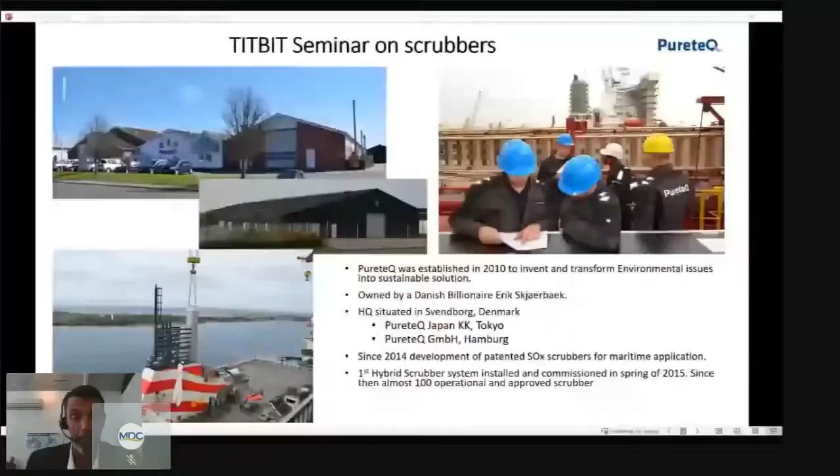First, I would like to say a few words about PureteQ, but if I could get up the presentation, please. Is the presentation on now, Henriette? No, it's now. The presentation is on now, Anders. Okay, thanks. Appreciate it.

Well, before I begin the presentation, maybe I should set the scene. When heavy fuel oil is combusted in a ship's engine, it results in release of exhaust gas into the atmosphere that contains sulfur and particulate matter. That's soot in normal language. This results in thousands of premature deaths due to heart and lung diseases across the globe, as well as a huge amount of acid rain. And this is no longer acceptable.

And that's why IMO released back in 2008 a new fuel directive that would regulate the content of sulfur in fuel, with major reduction in SECA areas from 2015 and globally from 2020. IMO also allows for the use of abatement equipment, such as scrubbers, as long as it proves that it can clean the exhaust to the same level as using compliant fuel.

Rest assured that these 3,000 to 4,000 ships that have already invested in scrubbers have not made a mistake. It does make good sense, and you will learn this during the presentation. It does not only reduce pollution, but is also beneficial climate-wise.

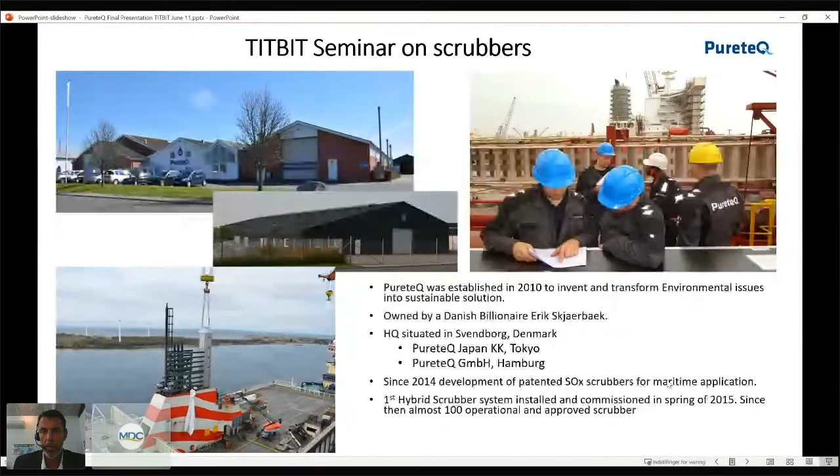I'm struggling a little bit with changing the picture here, but I'll see if I can do this. Sorry about that. Okay. I'll start the presentation by explaining a little bit about how scrubbers actually work. But maybe you can assist here, Henriette. I'm having problems with the presentation. I can't change the picture. You can't change it? You don't have it in full screen? Yes, I do. Send the presentation right away, you just continue speaking, and then I will share my screen instead. Does this work now? It comes now. Okay, good. It just took a while. Maybe the connection is slow.

Okay. Yeah. What we do in PureteQ is depicted on all these pictures. We do everything from designing of systems to the final commissioning and approval of the systems during sea trials. We train people in the use of scrubbers and so on. We do this globally, meaning that very few systems of ours are installed in Europe. The majority is in China and Japan.

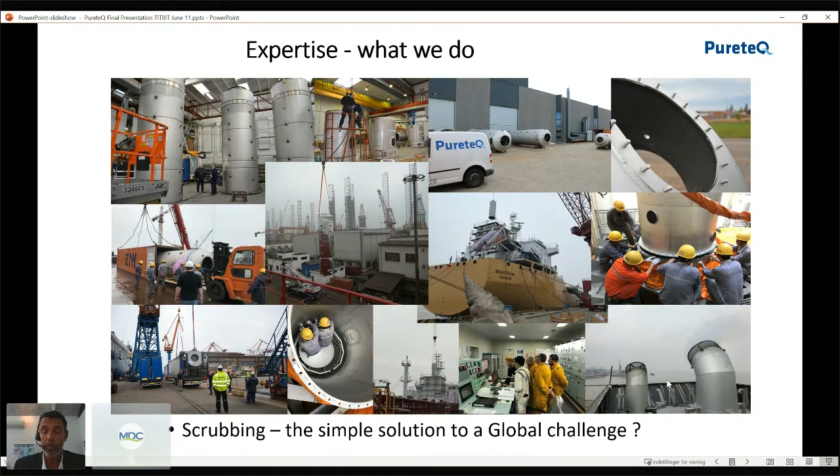And as it says on the bottom of the slides, is scrubbing really the simple solution to a global challenge? It might not be the only solution, but it's definitely one of the solutions that goes up. When we look into what is a scrubber, it's basically a washing machine that washes the exhaust gas coming directly from the engine. Practically wise, you basically take out the silencer from the engine, and then you connect a scrubber instead, leading all the exhaust gas through the scrubber.

First, you cool the gas to make it take up less room, and then you start scrubbing or washing the exhaust gas. And we do that in a specific way in our scrubber. So just think about a big washing machine that is washing the smoke. These scrubbers come in different types. You can either have open loop scrubbers, which are by far the most in the world, and then you can have closed loop, which are by far the least in the world, and then you can have some hybrid loops, which can go both open loop and closed loop.

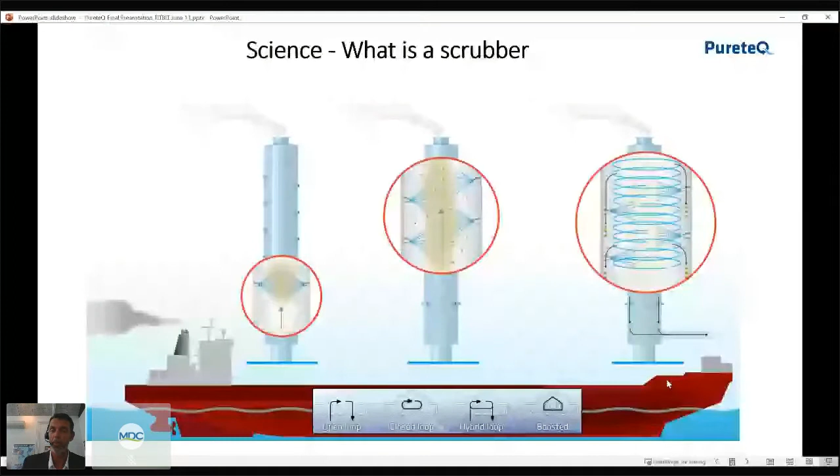If we look into the open loop scrubbers, what's happening there is you take in seawater, and then you pump it into the scrubber, using it for cleaning the gas, and then it's being released through drains in the scrubber and directly into the ocean. You measure the exhaust gas on the top of the scrubber to make sure that the exhaust gas is in compliance with legislation, and you also measure PAH, turbidity, and pH value of the water before being released back into the sea. And there are some limitations as to what you can release. It's very simple. The seawater simply reacts with the sulfur in the exhaust gas, thus pulling it out, forming salts.

The benefits of continuing use of HFO instead of just, as many say, use compliant fuel, I mean, fuel that has been designed by refineries throughout the world, where they have made the effort of taking out the sulfur, is that it gives out much less CO2 compared to using compliant fuel, because not a lot of energy will have to be used to make new products. When you're talking about HFO, it's actually a residual fuel, meaning that that is what is left when you have made all the other stuff like diesel and gasolines and so on.

It also reduces sulfur emissions to much less than compliant fuel, and thus there'll be less acid rain. And engines will be kept optimized because engines were made for HFO, and there'll be less emission of particle matters. And basically, as we see it, it is status quo before and after. I mean, before in time, the smoke would go into the air, and then you had some rain, and all the particles would go back into the ocean. Now we take it out in a scrubber and keep it out of people's lungs.

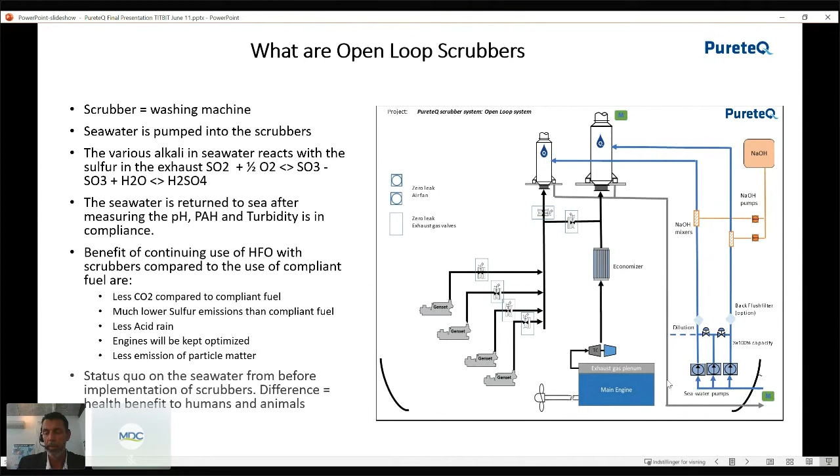If you look at hybrid / closed loop scrubbers, what you do is now you don't take fresh water in from the sea all the time. Now you just recirculate the water. But that means in a short while there will be no more alkalinity to react with the sulfur back in this water. So you have to add an alkali, like it could be caustic soda, and then make the balance, the chemical balance. You have to bleed out some water. This can either go into sea after being cleaned in some water treatment unit, or it could go into holding tanks also after being cleaned and then lifted out to land.

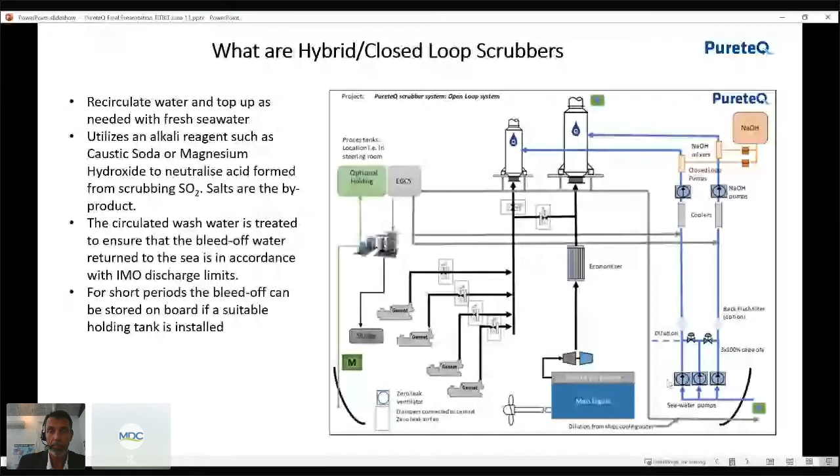The alternatives to scrubbers. Well, as we see them now, is LNG, LPG, but that's still fossil fuels, and there are some ups and downs about using that. I'll come into that later on. Then you could use alternative fuels like biofuels and even ammonia. Ammonia is one of the fuels that are talked about a lot these days. And of course you can use the ultra low fuel oil, either as a straight run or blended. And then of course there are abatement technologies like scrubbers.

There's hydrogen. You read in the newspaper recently that a big hydrogen factory is going to be manufactured in Copenhagen. And then of course there's also nuclear, which we as engineers see as the best solution, as it's the cleanest solution that there is. So I think when you look at it, there is no magic bullet, and it's hard to imagine what kind of technology will bring us in line with the 2050 targets. Most likely it's not limited to one technology. We see scrubbers as intermediate, but it's going to be here for a long time. And at present, scrubbers are the most feasible solution pollution-wise as well as climate-wise.

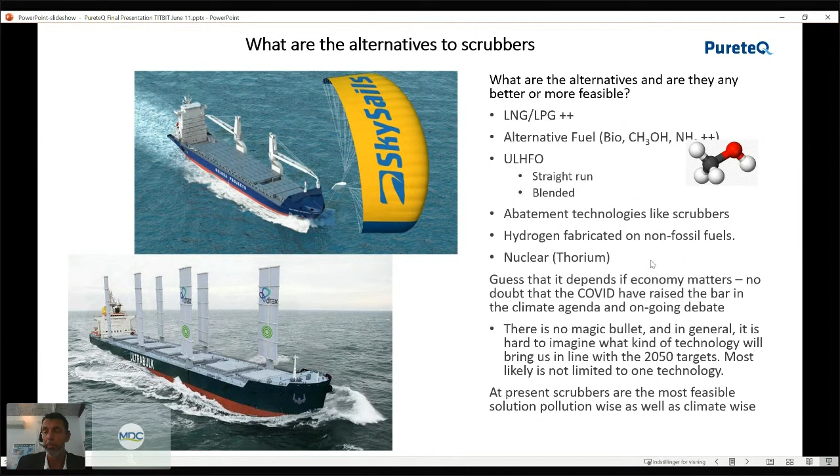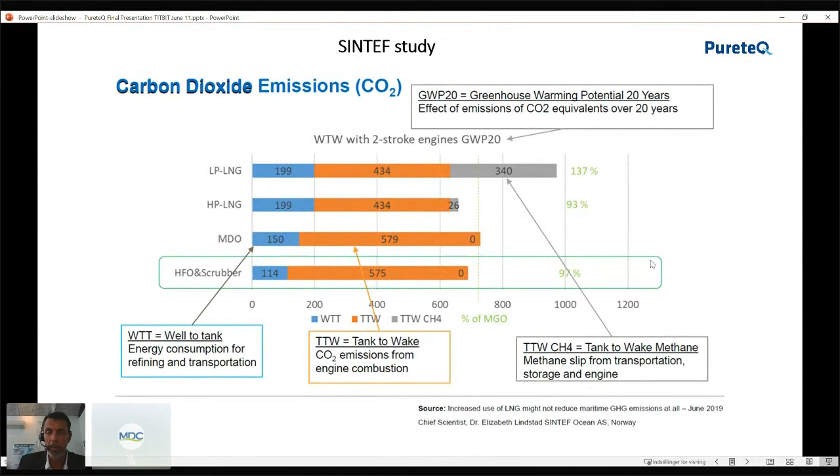If we look at a business case that's already out there, DFDS was one of the pioneers that started installing scrubbers many years ago, I think already back in 2008. And now one of the ships has been operating for more than 10 years. It's been doing 56,000 hours of main engine running, and in the meantime it's consumed 150,000 tons of fuel.

If it was just to run on compliant fuel, it would by now have released 1,721 tons of sulfur. Whereas with the scrubbers, it's actually measured all the time. There's continuous measurement. They have only released 29 tons of sulfur. So it's actually quite beneficial for the environment. And apart from that, they have saved a lot of money from having to buy more expensive fuel.

The benefits of the 2020 compliance and the reason for the IMO to take this into consideration are, of course, the health part of it. That means pollution. So if you use compliant fuel, you have reduced emission of sulfur into the atmosphere, and thus you'll have less contribution to lung and heart diseases. But if you use gas cleaning systems, you clean out even more sulfur. Another benefit is that you reduce the soot, the carbon black, into the atmosphere.

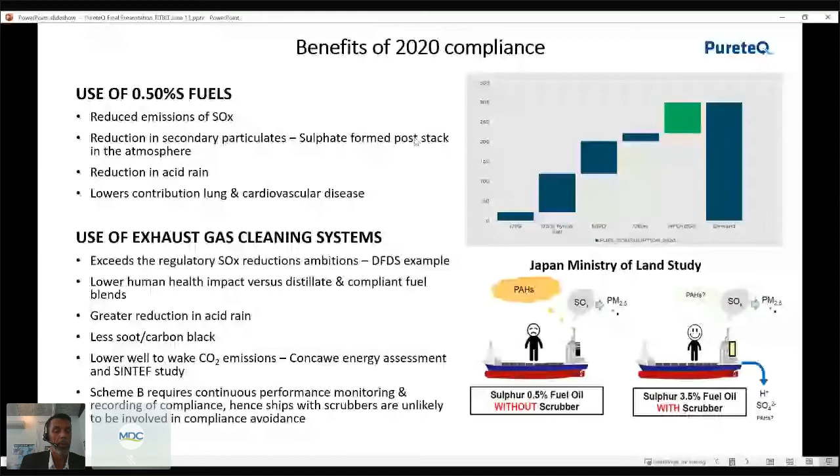Some of the installation mistakes that we've seen have been incorrect situation of sensors, piping that does not fit, too few supports for piping, cable trays, incorrect installation of the monitoring equipment, and work not carried out in accordance with description and recommendations. That's the mechanical mistakes. In the electrical part, it's twisted cables leading to electrical disturbance, incorrect use of cable glands and no markings, wrong positioning of cables, and so on.

But along the way, we have learned how to cope with this, because as an industry, we cannot just lean back and say that the yard has to do better. We as suppliers also have an obligation to assist in rectifying defects and building our products so that they are easier and faster to install.

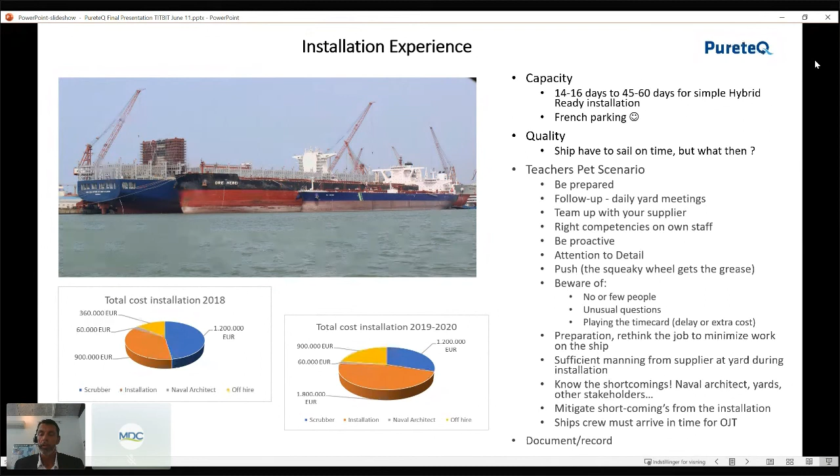It's the feature that the ship owner initially had the greatest resistance towards, but today it's something that they value the most. There's no doubt that these COVID travel restrictions have accelerated the shipping industry's general susceptibility to digital solutions. Our system is based on a very safe system so that it cannot be hacked. It's Secomea routers and TeamViewer access. So it actually works quite nicely.

Today we send engineers across the world; when we cannot send engineers across the world, we have to log on to systems, and we have even performed sea trials from a distance. We do the online monitoring to make sure that the systems are in compliance, and we also do systems optimization at a distance, reporting to flag states or the Coast Guard.

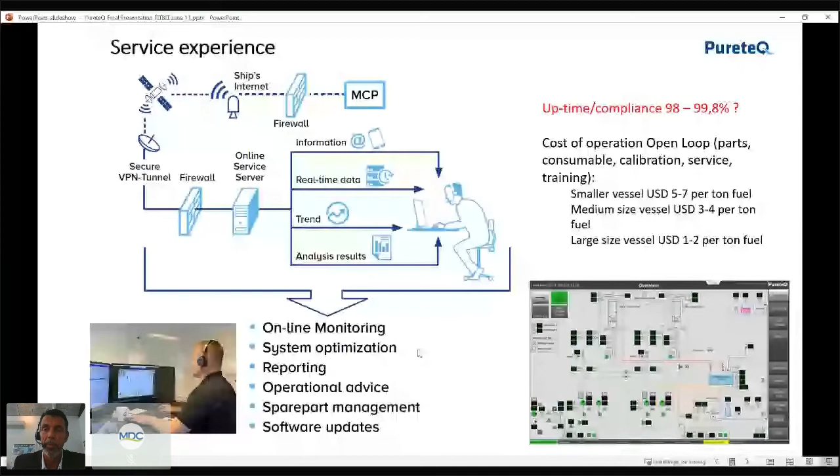And I think that everybody in the business, including the oil companies, now realizes that things have to go back to normal. I mean, there will be a spread because it's more expensive to produce distillate fuels than it is to produce a byproduct. So we will see an increased span, and thus the guys that have installed scrubbers will earn good money by installing these scrubbers.

I think that's all I had to say for now. Back to you, Henriette. Thank you so much for your contribution to the lunch today, Anders.

Can you be more precise about how long the payback time for a scrubber is before versus now? Well, if you look at the average before, not when it was really hot. When it was really hot, you had $300 in span. But as an average before, it was somewhere between $150 and $200 between the heavy fuel oil and the distillate fuel or the compliant fuel, low sulfur fuel and extremely low sulfur fuel.

Which means that before, you had a payback time on some of the big vessels we did of like 8 months, 10 months when it was a nice span. But now you are looking at somewhere between 2 years and 4 years, depending on how much fuel the vessel is actually using. And the ones that use less fuel, of course, in times where the span is lower, will not have scrubbers installed because it's not economically feasible.